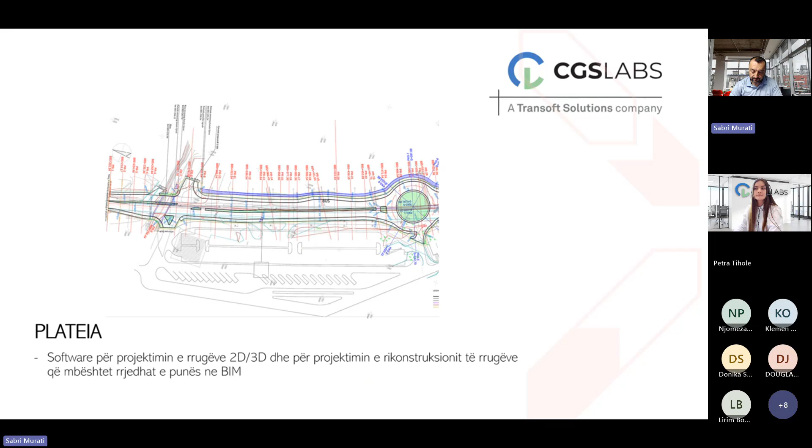Gjithashtu kanë software AutoPath dhe AutoSign, ku AutoPath është software për simulimin dhe analizën për korsitë, rreth-rrotullimet, parkingjet dhe kthimin e automjeteve. Ndërsa AutoSign është software për projektimin e shenjave të trafikut dhe shenjëzimin e rrugëve.

Softwarët e CGS Labs janë software të bazuar në CAD platform, do të thotë që për të punuar në këto software duhet të kemi AutoCAD ose Civil 3D.

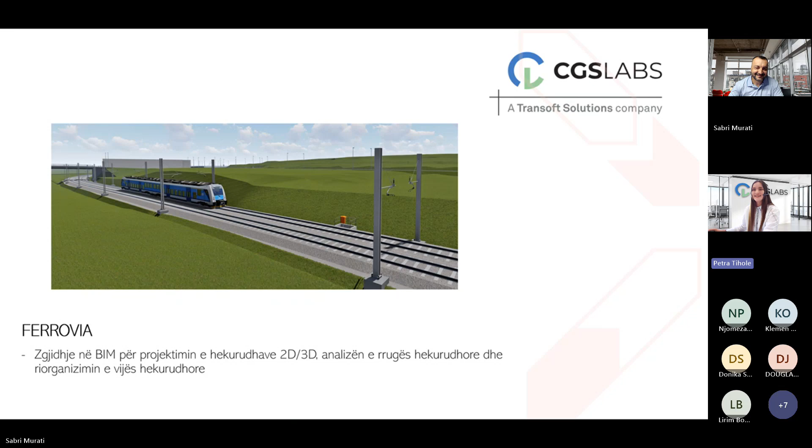Okay, thank you Sabri. Just a second while I share my screen. So thank you again for your nice introduction. My name is Petra Tihole, I'm the product manager for Ferrovia, our railway design software solution, which I will be presenting today. If you have any questions during the session, please feel free to write them in the chat, and I will answer them at the end of the webinar during our Q&A session.

Before I explain what Ferrovia actually is, I would like to start with the bigger picture. Why do we even need a solution like this in the first place? Railways today face many serious challenges. Designing new lines is very complex, not only because of strict geometry and high safety standards, but also because our cities are becoming more urbanized. Very often there is simply not enough space, and every alignment has to be carefully planned to fit into the existing environment. At the same time, more projects have to be delivered using the BIM methodology, which means designers need to develop new skills and adapt to new ways of working.

Another big challenge is reconstructions. Many railways were built decades ago and no longer meet today's requirements for speed, safety, or capacity. Upgrading them means we have to combine old infrastructure with new standards, often in very limited conditions. On top of that, such projects sometimes require very fast solutions, and this is exactly where the software has to support us. It needs to be professional, powerful, but at the same time simple enough to learn quickly so that all colleagues in the team can use it efficiently.

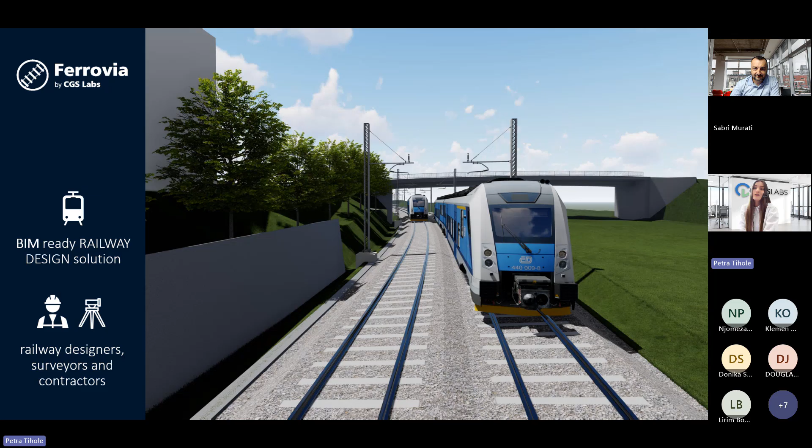And with this in mind, let me now introduce Ferrovia itself. Ferrovia is a professional, BIM-ready railway design software developed by us, by CGS Labs. It runs on top of AutoCAD, Civil 3D, and also on BricsCAD, so engineers can work in the environment they already know. The workflows inside Ferrovia are designed to follow real engineering practice, which makes the software both powerful and at the same time very easy to learn.

If I compare Ferrovia with Civil 3D or with OpenRail Designer by Bentley, you must know that those other software solutions are very complicated to learn, sometimes also to use, especially if you are a beginner. But with Ferrovia, I will show you one workflow today that it's very easy to use. Every time I talk with our clients, they always tell me they love using our software solutions because they are easy to learn. If we got a new employee, we can teach him very quickly.

So I think that's the biggest advantage of our software solutions. And also when we are developing new features, new tools, we always have this in mind. As a team of developers, we join together in a team meeting and discuss, okay, is this dialog box fine? Will people understand where they have to put data and what is the output, or is it complicated, and we can then do something about it. So we really try hard that our software solutions are very easy to use.

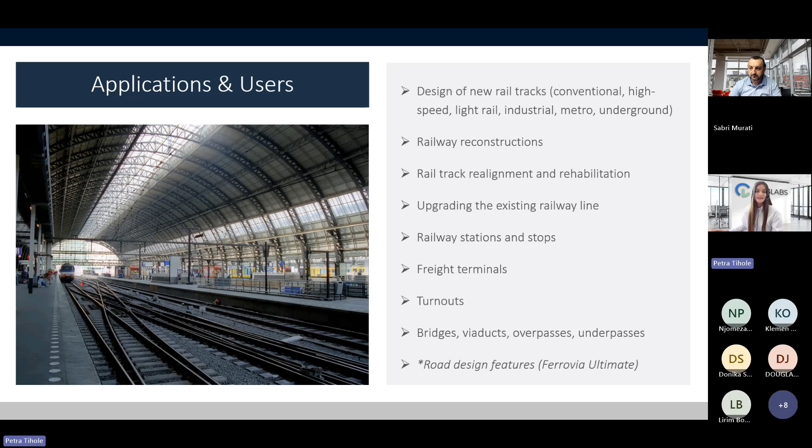When engineers are designing a new railway line, Ferrovia supports them from the very first steps. In the conceptual phase, different alignment alternatives can be tested quickly using digital terrain models and geometry design tools. Later, the same concept can be developed into a fully detailed BIM model with horizontal and vertical alignment, transition curves, cross-sections, and 3D solids. This means one single software can take you from a simple idea on the map all the way to a precise, data-rich BIM model that can be shared with other disciplines and used for construction. Now let me quickly explain what a typical workflow looks like for such a project.

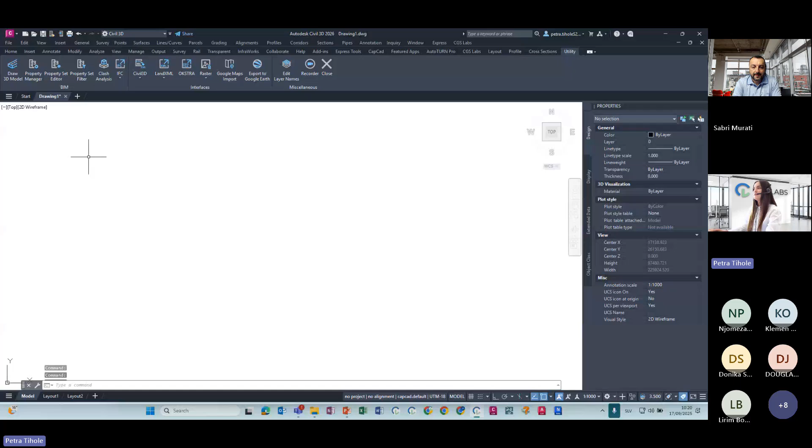Now we will move directly to our software. You can see that it currently runs on top of Civil 3D. If I click here on the CGS Labs tab, I can see all our CGS Labs products. And if I select Ferrovia, then four or five more tabs will open.

In the first step, you have all the commands for digital terrain modeling and creating the alignment. Then for the profile view, cross sections, and then utility tab where you can find tools for 3D modeling and also for BIM so that you can attach property sets to your 3D models. This way you can see it also works like our engineering practices. We usually start with the terrain, continue with axis, profile, cross sections. In this mind, you will also always know where to find commands related, for example, to digital terrain.

So it's very easy to find the commands you are looking for. At the beginning, let's start with digital terrain model. We have a lot of options for how we can import the data or create a digital terrain model. We can import different file formats, TXT file, XYZ. Then you can import point clouds, so you can definitely work with point clouds. You can also work with TIN surface, with CGS Labs TIN surface.

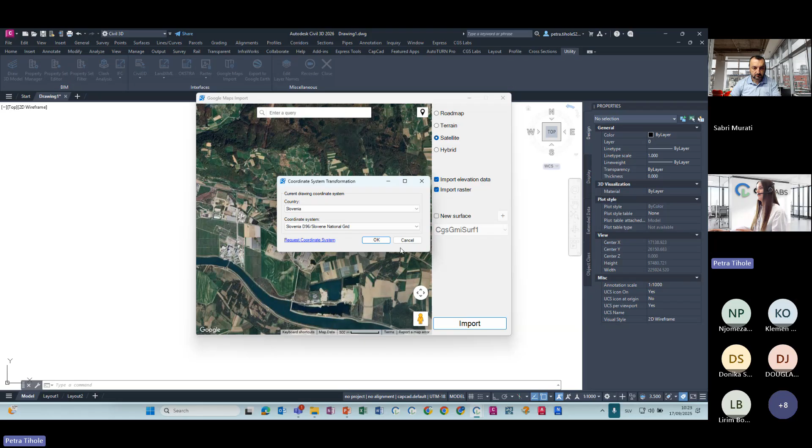You can also create a digital terrain model directly with this command, but this time I will uncheck this option and show you how you can create CGS Labs terrain with different tools. When I click import, I select the coordinate system. Here you also have a lot of different options, and if one is not available, you can always contact us and we will add this new coordinate system. I click OK.

It imported a raster image. You can see it also imported terrain. This terrain is totally fine if you are doing some conceptual design. So for today, it's great. Now I have to continue with creating the digital terrain model.

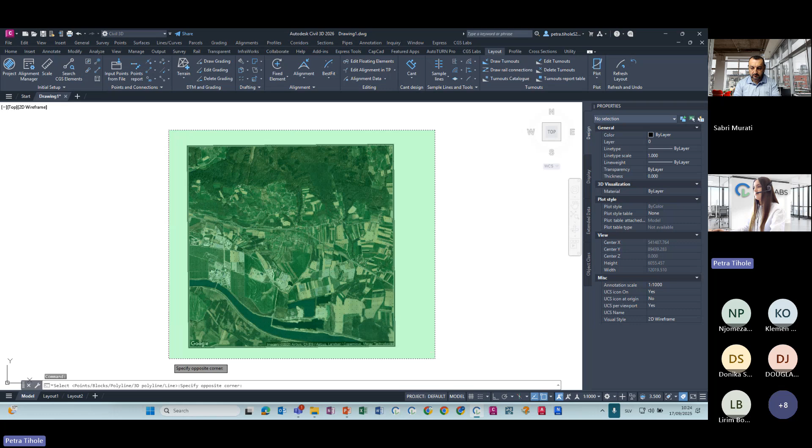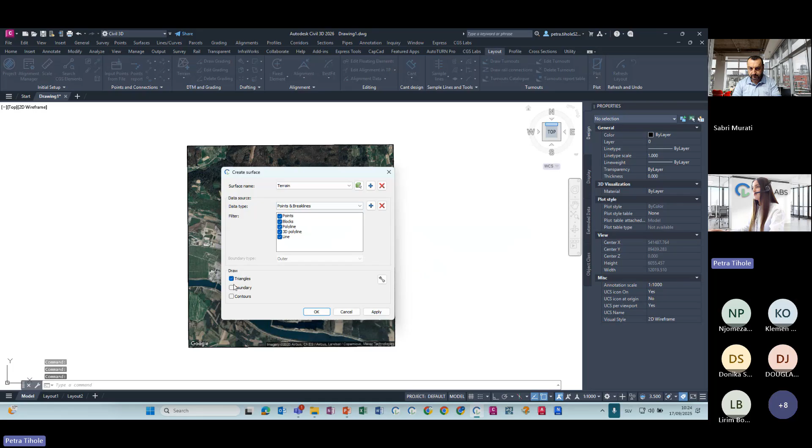Under the layout, here I have different options. I will run this one, define the name. It opens a new dialog box. Then I select the points in the drawing, and I can also select how it will be drawn. If I move, you can see this triangulated network, but I can also just hide it. So let's say I will work with this terrain, but I will just hide it in the drawing.

Then the next step is we can create alignment. But before, we will just define a new axis in the alignment manager. I can define the axis name, then I have different options for starting station, because in railways we usually don't start with 0, but with a specific number. Then this option, if I check it, will automatically drape on the default terrain. Then I have different spiral types.

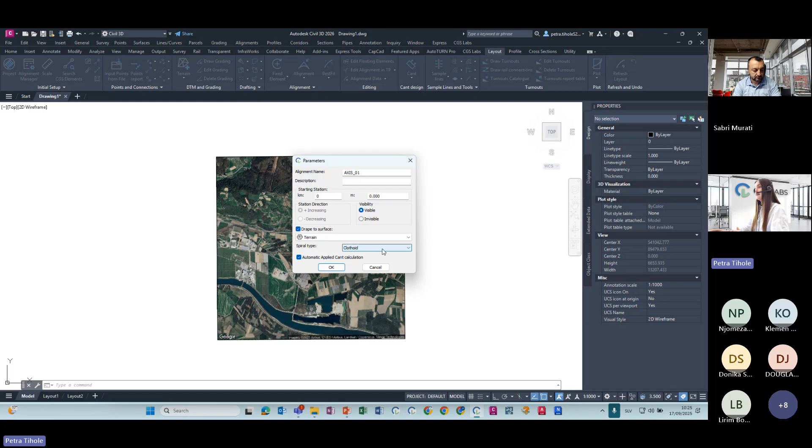You can see that Ferrovia has a lot of different options. And then I can also check or uncheck this. I will uncheck it and show you later how to calculate cant. Then on the category, I have other options: the design speed, gauge, or critical parameters. And I will now draw the alignment.

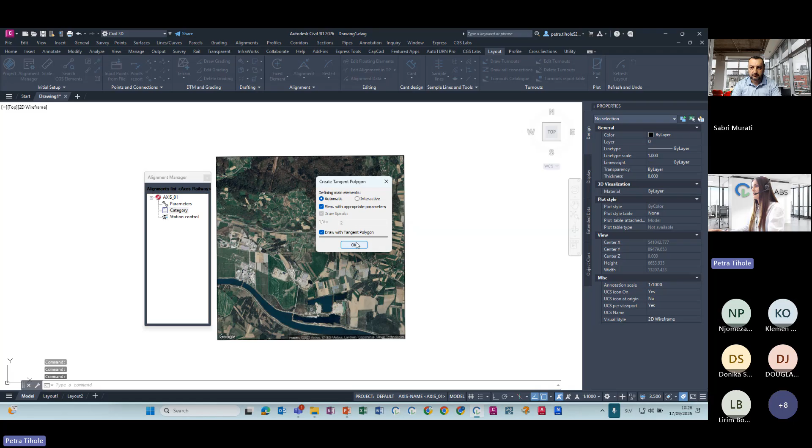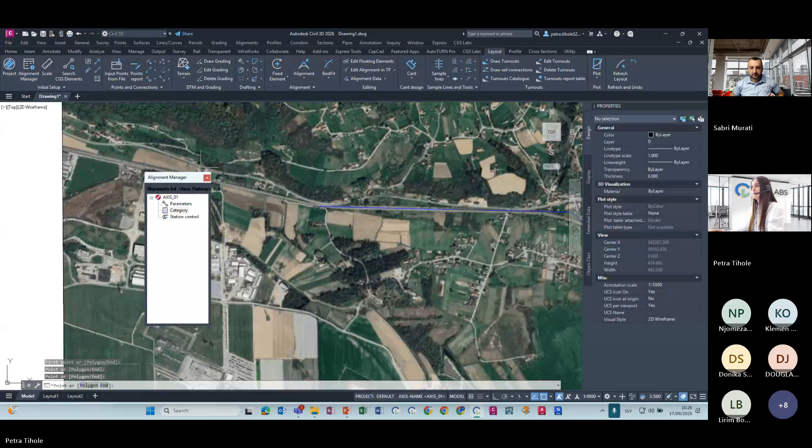Here also a lot of different options, from drawing with tangent, polygon, floating methods, stick method. So I will use tangent, polygon, zoom in, draw vertices, and my alignment is created.

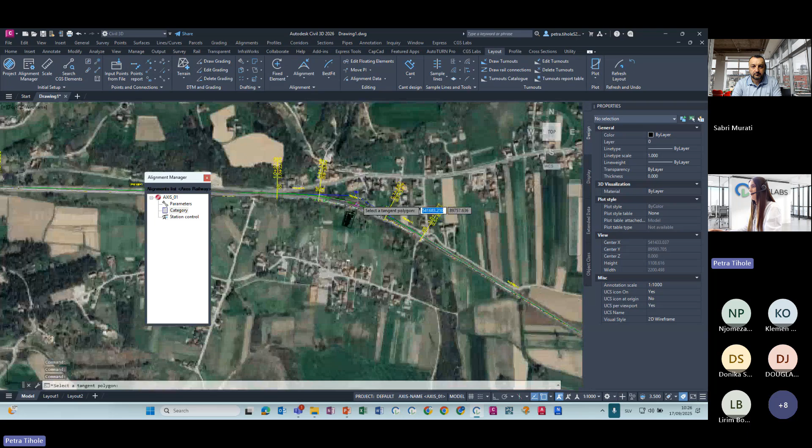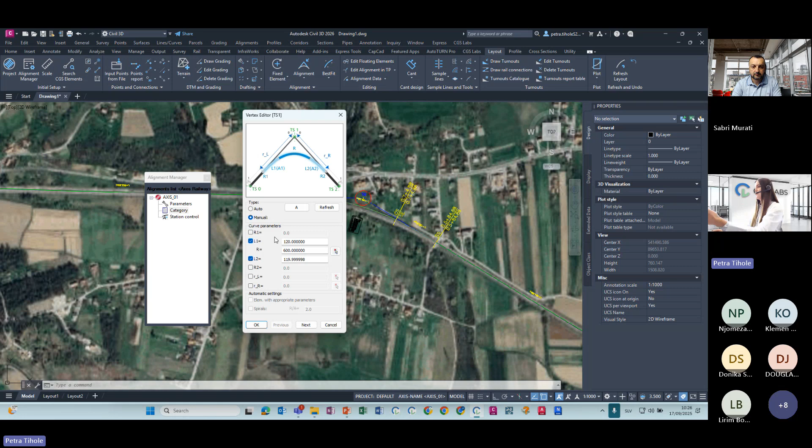I have different options for how my labels will look, and a lot of options for editing. I can move the alignment, and also edit the specific radius. Those values were automatically created, but I have the option to manually change them. Yeah, a lot of different options.

I can create sample lines by drawing them along the axis, and then calculate the cant. First you have to calculate it based on the standard, and then you can open the cant editor dialog box where you can manually change these values.

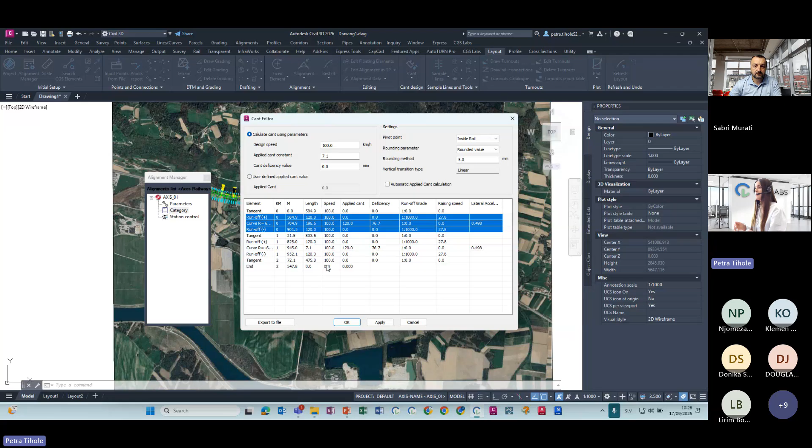Even here in Slovenia, our railway lines are used for passengers and for freight transport, so sometimes we have to calculate our design speed and cant in Excel, and then import it. Right now we are working on this tool, so for the next release it will be much different, because it will have an option to change all those values directly in the tables, export them to Excel, and paste those cells directly here. A lot of news is coming for the new release of Ferrovia.

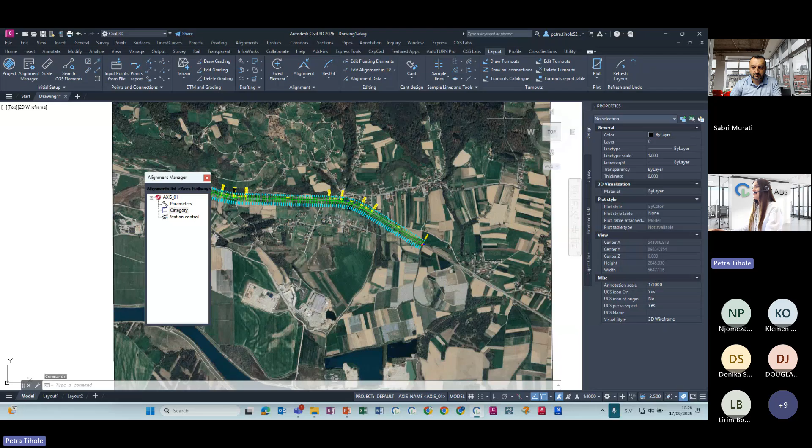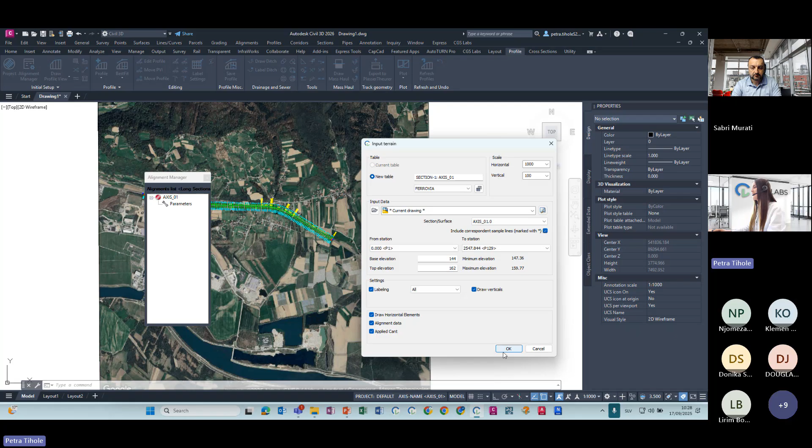After we have the alignment and calculated our cants, we can continue with the profile. I will draw the profile view. There are also different options for how this table will look—it could be totally personalized and localized, and you can change the scale. I will insert it, and then I can create the profile view.

I'll draw a profile. Let's say it will be in the fill at the beginning, and then I just define it. This is just a simple, quick example today.

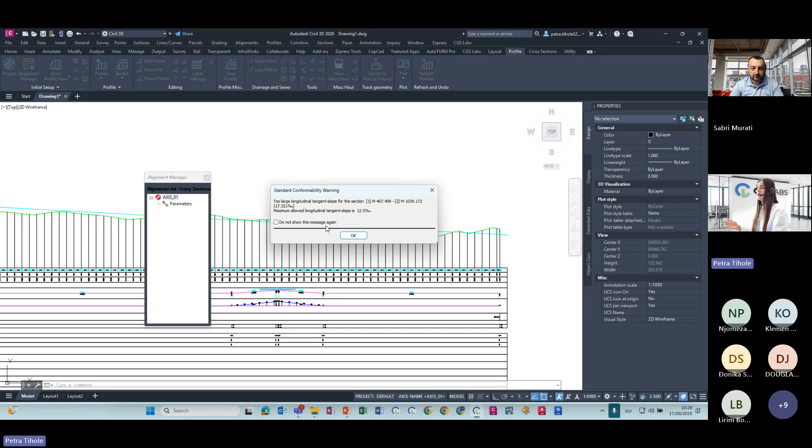You can see that it also warns you, because Ferrovia is localized for some countries, and right now it's showing me a message that the longitudinal tangent slope is too big, so it warns you that you have to change it. But you can also continue if you want.

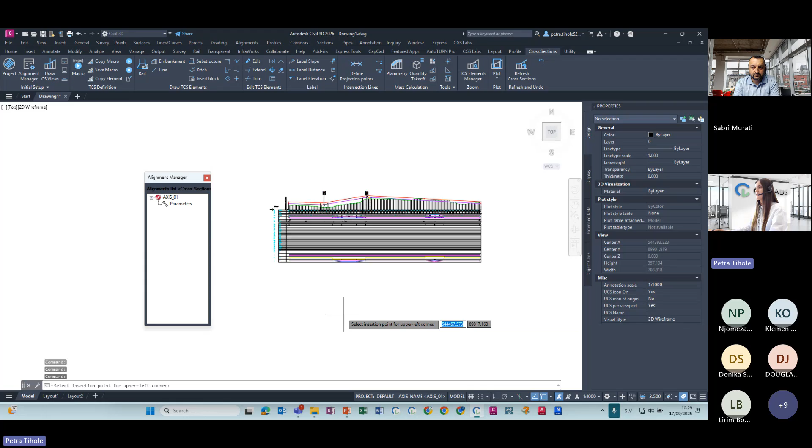After the profile, we can draw a cross-section view. First I will insert them into the drawing, and then I will also draw the rail.

Here is another dialog box where you can define all those parameters, like the rail type—you can change it and select between different types, or you can add your own.

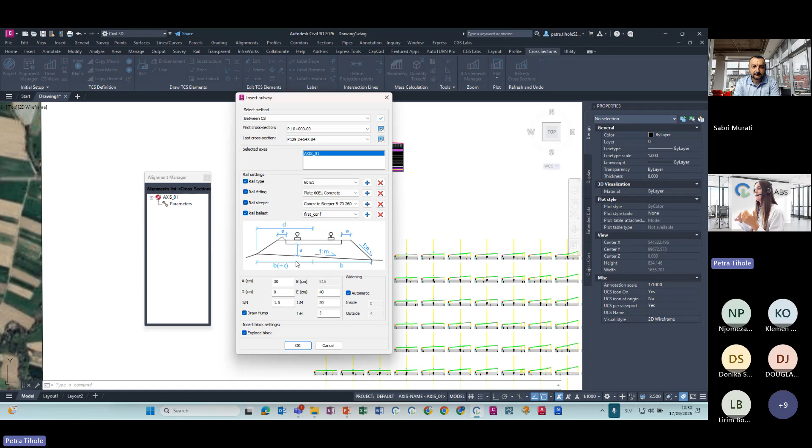Then there are sleepers—you can select between concrete or wood, or as I mentioned before, totally localize for your country and add your own blocks. At the bottom, you can also define all those parameters and the slope, which could be unconditional, one-way, or two-way. So different options are available.

I will just insert it, so it will draw it right now. I selected that it will draw those elements in all cross sections, but you can also select just a specific one, which is important when creating typical cross-section elements.

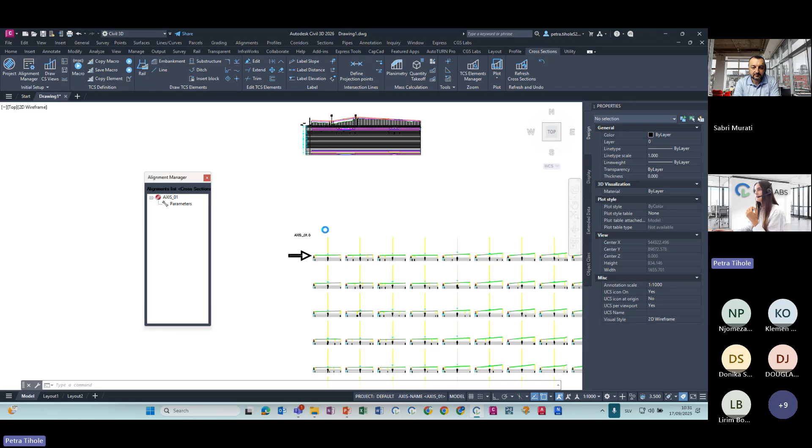At the top we have different options for how to draw typical cross-section elements. Right now I inserted the rail, but you can also draw the embankment, substructure, or ditch—those are some typical elements—and then you can also insert a block.

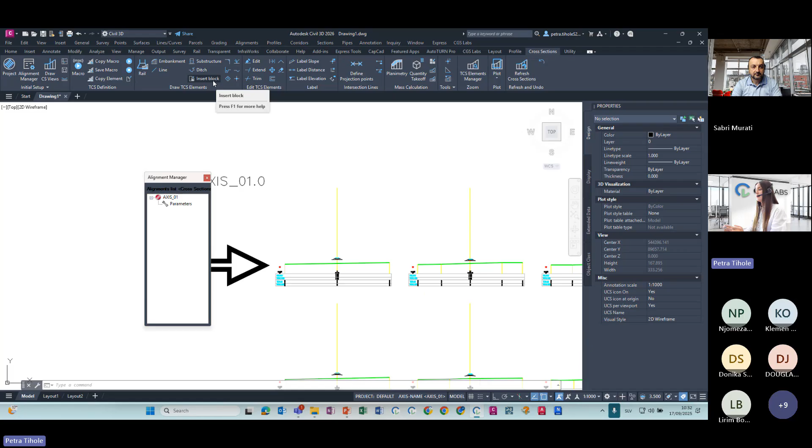What is also very good about blocks is that in the last release we added the option that if you have hatches in the blocks, they are automatically converted into our planimetry quantities, which means that based on them you can calculate quantity takeoffs and also create 3D models.

So if I zoom in now, you can see my cross section. The next thing is that I can draw other typical cross-section elements—for example, embankments.

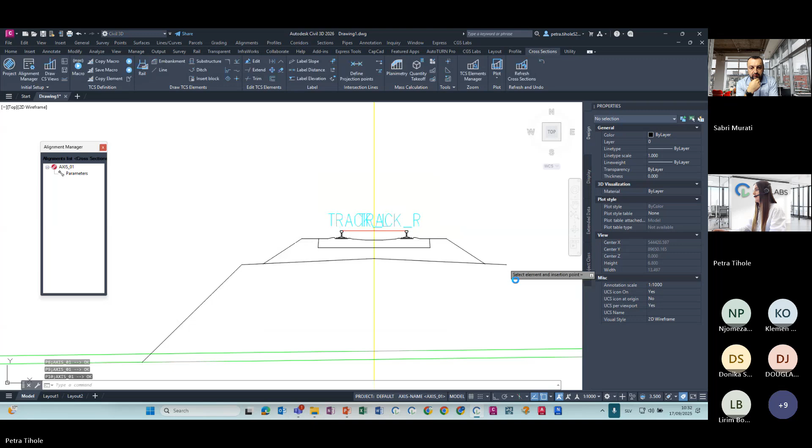Then I can start with planimetry. Planimetry is very important because it's the basis if you want to do the quantity takeoff and also create those 3D models. Planimetries are basically hatches inside those elements.

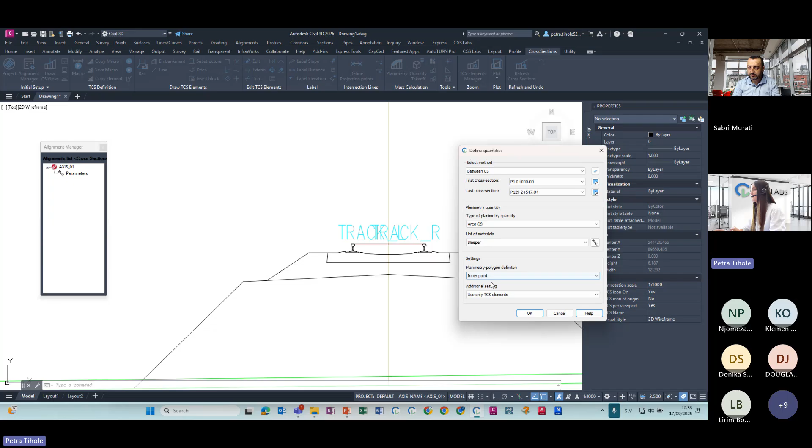So I will show you how I can—sorry, sleeper, okay. I have different options. First, for this sleeper, I will use the inner point—I just click somewhere on the polyline and inside it, and it will automatically planimetry all those cross sections. But I also have different options.

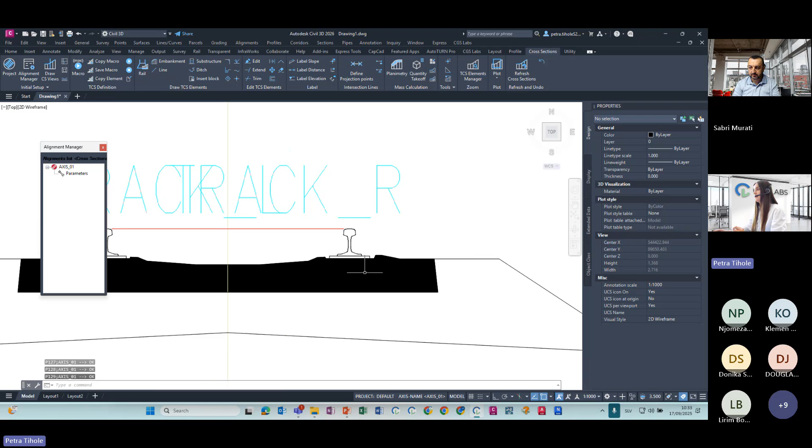I can also planimetry between two polylines, for example. Just a second, I will select the ballast—click, this way I select all the elements around, and it will planimetry this area.

So we can see it's very easy to define those cross sections, to define those hatches, those planimetry quantities. We also have one tool which is very useful—this is the macro. I will show you on the first five. Just a second while I find it.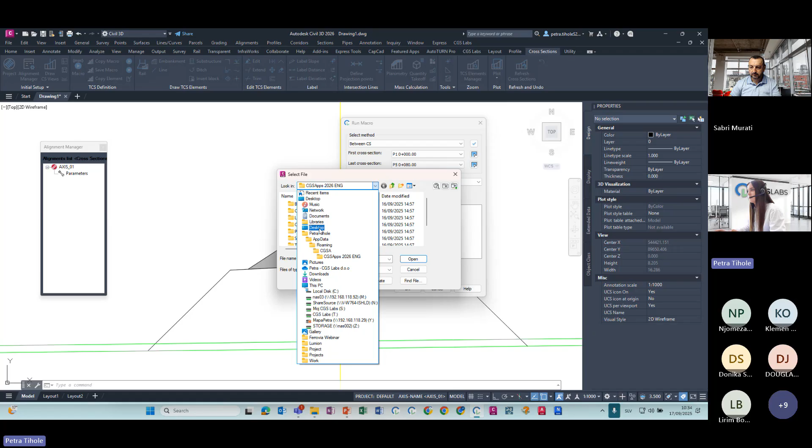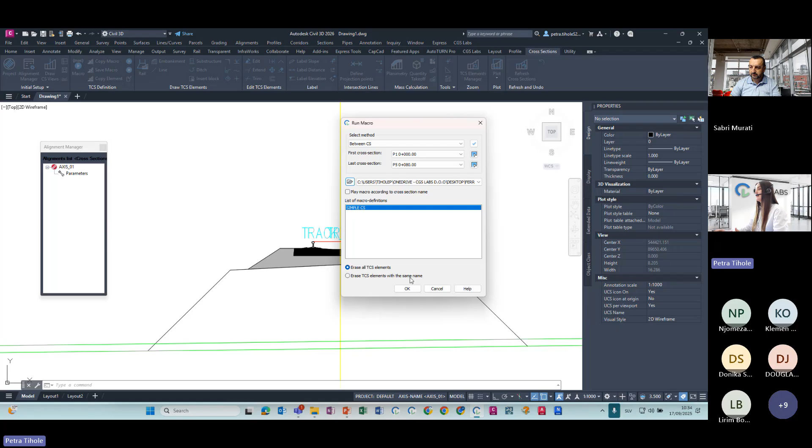Okay, so this is basically like the library of cross sections. Once you create one cross section, you can save it in the library, and then you can use it in other projects. So that's very useful. You can also send those macros to your colleagues so that they can also use it in their projects. So that's why it's very useful.

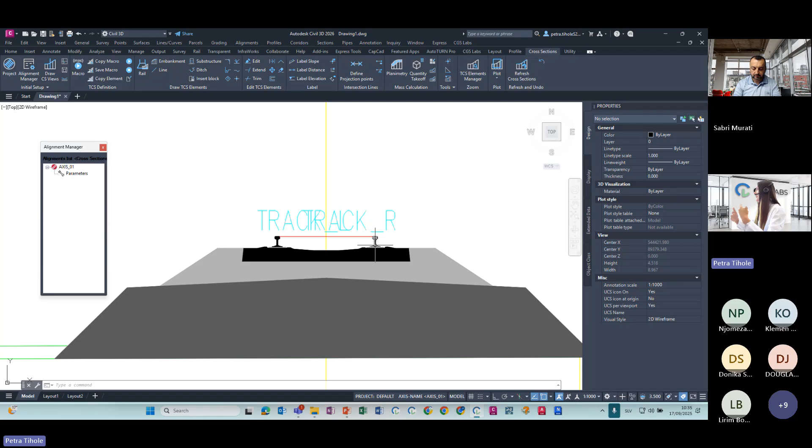And you can see that I created one basic cross section with those hatches. We are calling them planimetric quantities for each element. Based on this, we can then create quantity takeoff. So I will insert this in the drawing. I will not save it in the file this time, and also here, so you will see what will happen.

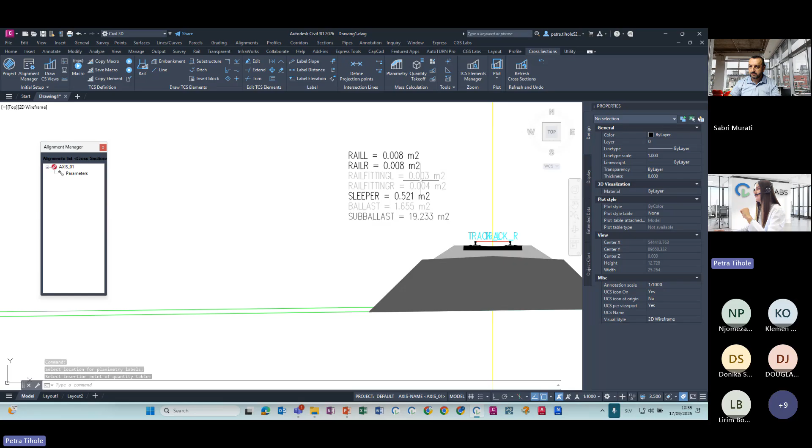Okay, so here I have all the volumes, the quantities for these cross sections, then here for the second one, and here I have a table for all the quantities in the drawing. Right now I have only the first five. And after I have those planimetric quantities, those hatches, I can also create a 3D solid. This is the way our software solution works.

So in this dialog box, I have to define where the drawing is saved. Right now everything is in my drawing, because you must know that Ferrovia can also work in a way that you are saving your drawings separately. So in one drawing you have a layout, in one drawing you have a longitudinal profile, and in the third one you have a cross section.

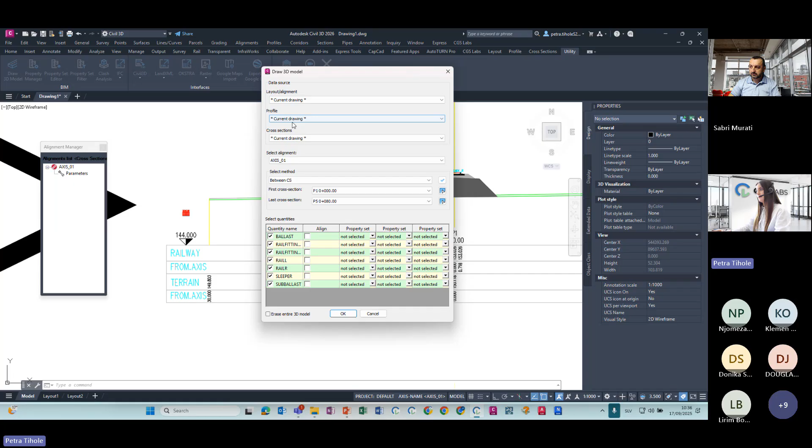That's why it's also giving you the option that you can select the drawing. And then here I select the quantities - those are the names of those hatches, of those planimetric quantities. And then if I want to create a BIM model - okay, unfortunately we don't have enough time today - I can also select property sets here and they will be automatically attached to the 3D model. That's the reason why designing here is very quick and easy.

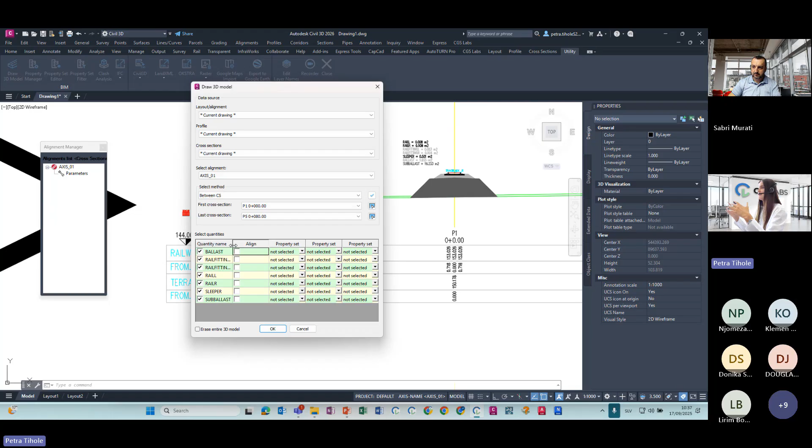And this align option is also something we usually check, that for curves, for example, it will do a very nice model in the curve. So it will follow the alignment, it will not be straight, but it will be curved. So that's why we have this align option.

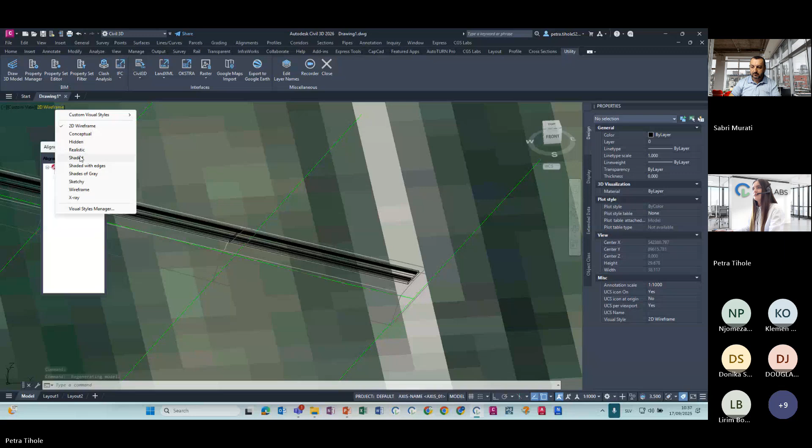But I will just draw the model, the beginning of the model, and you will see here that the 3D model is created. If I zoom in a little bit more, you can see the rails, the sleeper, ballast, and sub-ballast.

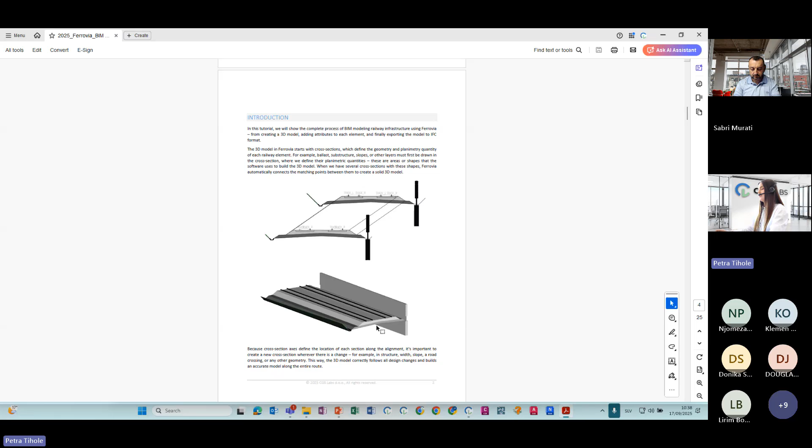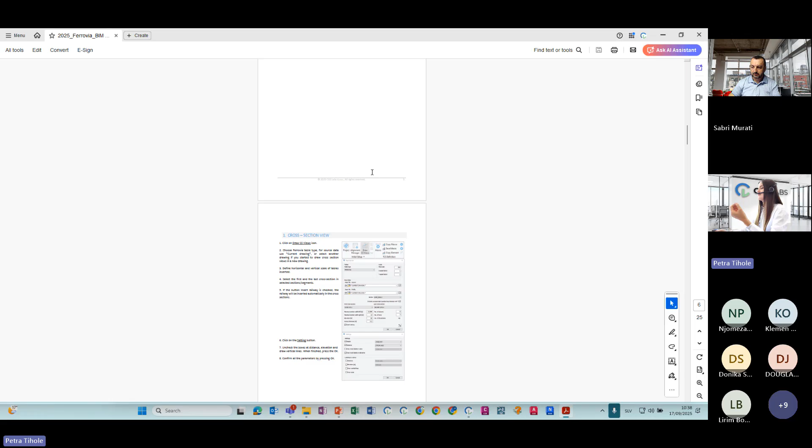Unfortunately we are very limited with the time today, but if you're interested more about BIM modeling, on our website you can also find this tutorial where we explain how you can create a double track railway. And also here is some noise barrier, and here is the whole process of how you can create those BIM models, and some useful tips and tricks.

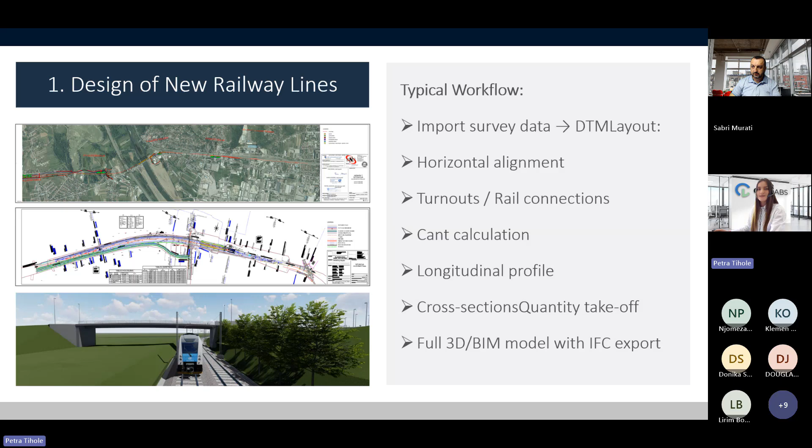But yeah, also, as I mentioned previously, if you're interested more about the workflow for more complicated projects, we are always available and happy to assist you and prepare another presentation. And of course, as I said, Ferrovia is used for much more complex projects and challenges.

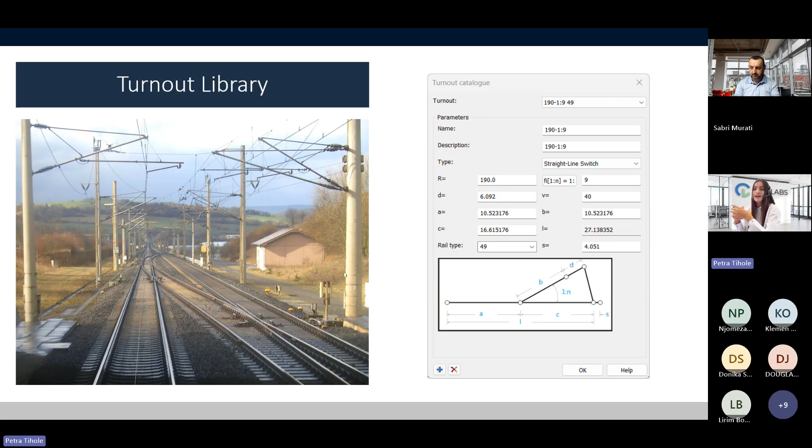As I showed you, with parallel alignments, with connected turnouts, Ferrovia also includes tools for automatic turnout insertion, where you can choose from a very big turnout library, and if needed, you can also add your own custom turnouts to the library.

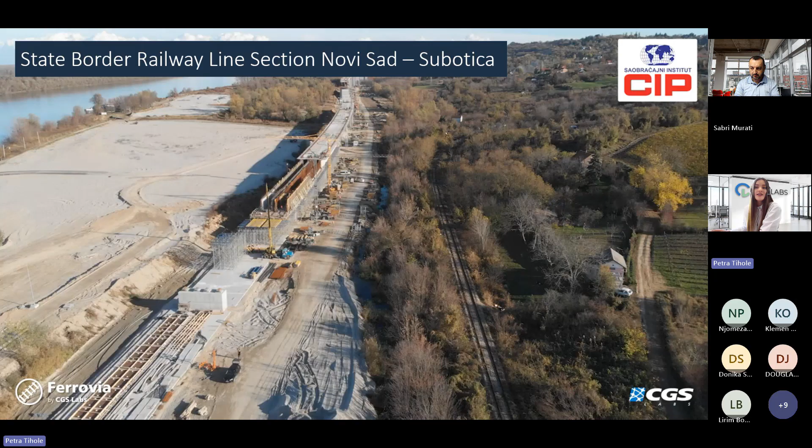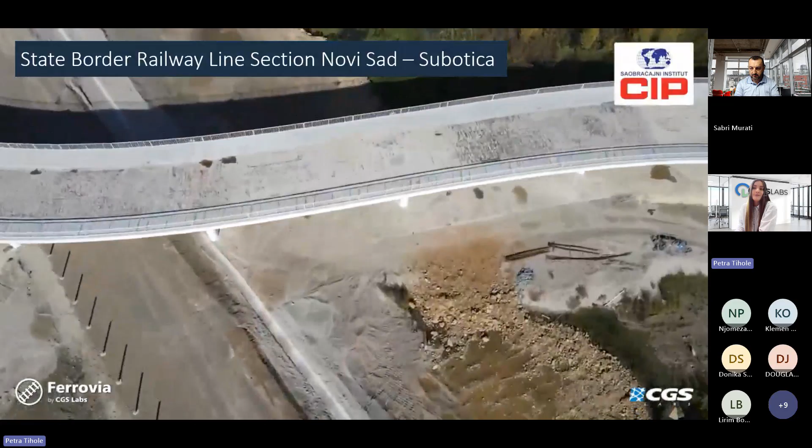And so, yeah, with Ferrovia our users design different complex projects. One example is this railway line section from Novi Sad to Subotica, which is part of the modernization of the international corridor between Belgrade and Budapest.

And the designer said that the biggest advantage of Ferrovia is its flexibility and dynamics, which allows rapid preparation of project documentation. They were also very happy with the CGS Labs support team, which was fully engaged and provided all the necessary help for this project.

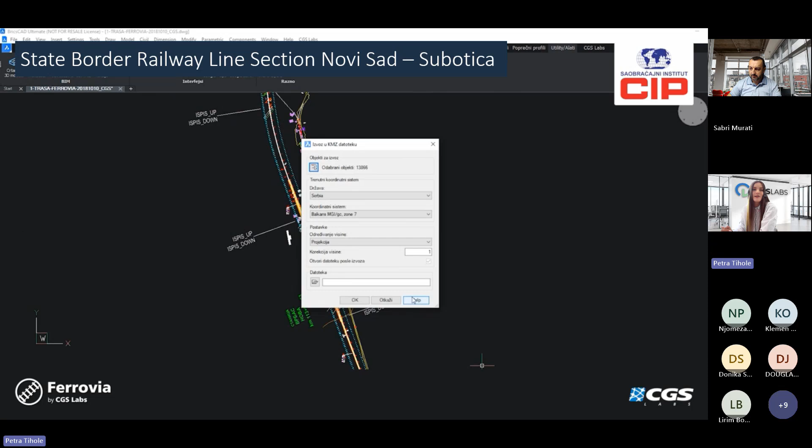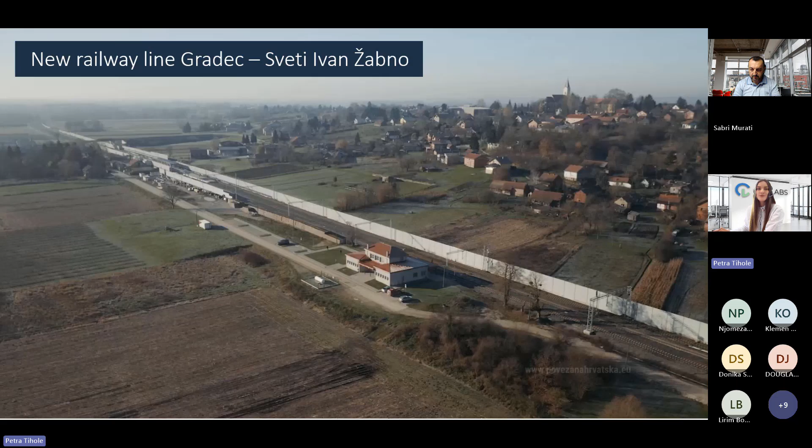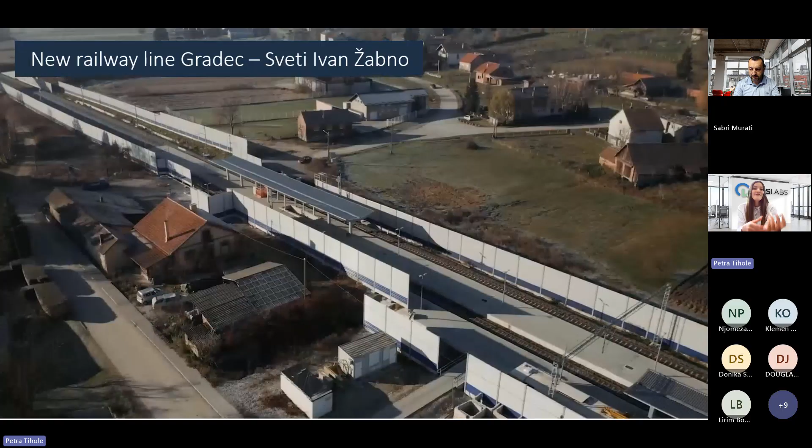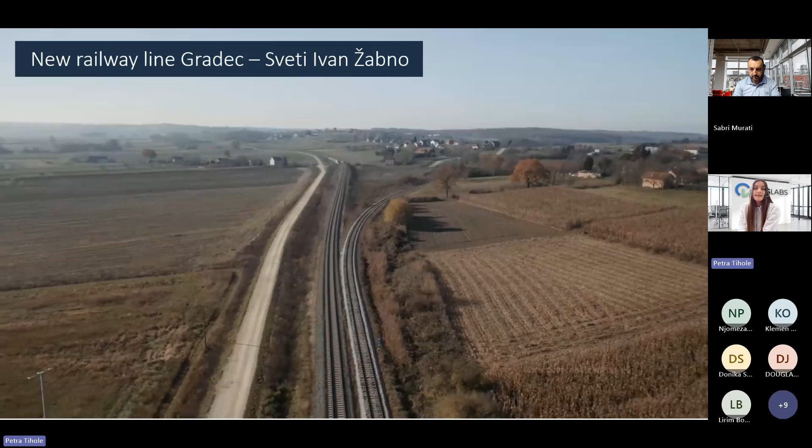The second case study I want to show you today is the new railway line Gradec Sveti Ivan Žabno in Croatia. Fun fact: this was the first newly built railway line in Croatia in 52 years. The project was designed by the company Granova, which used Ferrovia to prepare the complete project documentation, including the alignment, profiles, cross-sections, and all related design elements. The line connects to existing railway corridors and will significantly improve regional mobility.

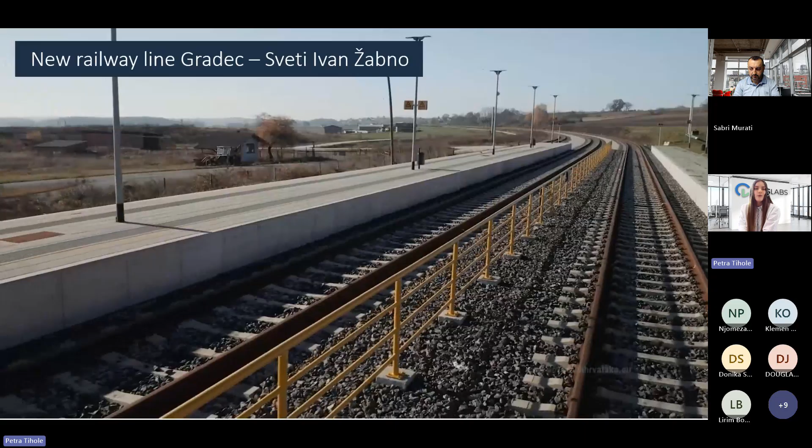In this video, you can see all the new railway tracks, also new stations and new smaller stops.

The third case study I want to present today is the Ilidža-Hrasnica tramway line in Sarajevo. This project shows that Ferrovia is not used only for conventional railways, but also for tramway systems. The line is almost 13 kilometers long and is one of the most important public transport projects in Bosnia and Herzegovina in recent decades. The design was prepared by the IPSA Institute, a leading engineering company in the region, and the project included 2 terminal stations, 11 tram stops, 7 switches, and complete reconstruction of the road corridor.

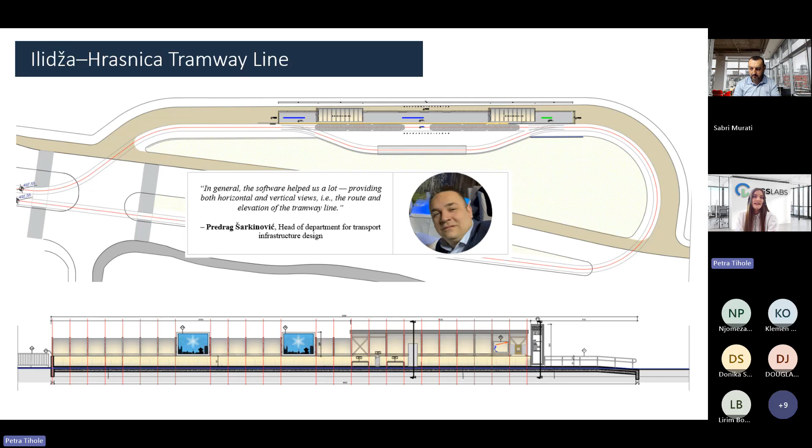One of the main challenges was the very limited space, because the line runs through a dense urban area and also crosses protected water zones that supply most of Sarajevo's drinking water. So Ferrovia was used to design the horizontal and vertical alignment model, cross sections, and integrate the stops and stations. In the end, the tramway will improve urban mobility, reduce traffic congestion, and support more sustainable development for the Sarajevo region.

So until now we have been talking about the design of new railway lines, but the second very typical use of Ferrovia is for reconstruction projects. Many of our railways were built decades ago and no longer meet today's requirements for speed, safety, or capacity. Upgrading them means we have to combine the old infrastructure with new standards, often in very limited conditions. This is exactly where Ferrovia has special tools to make the job easier.

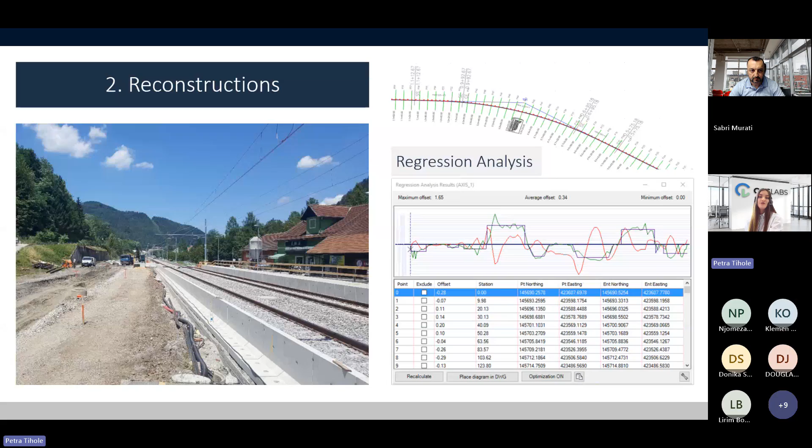One of the most important tools is definitely regression analysis. With these tools, engineers can take survey data from the existing track and calculate the best fit alignment. This allows them to understand how the current track is positioned and where corrections are needed. Based on this, Ferrovia makes it possible to design new alignment profiles directly on top of this survey data.

The third very typical use of Ferrovia is for maintenance and realignment. As we all know, over time tracks move away from their ideal positions. This affects the comfort of passengers, and in the worst cases, it can even reduce safety. That's why regular track maintenance is so important. In recent years, we established workflows that make the verification of horizontal and vertical geometry much simpler, exactly as needed in field maintenance scenarios.

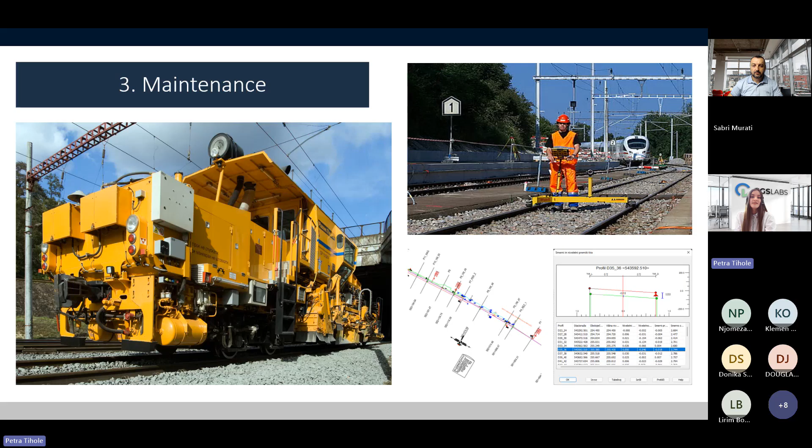The process starts with field measurements, which can be carried out using traditional surveying methods or with a measurement trolley. These measurements are then processed inside Ferrovia, and the dedicated models allow an analysis of deviations, and the results can be exported in formats compatible with mechanized track alignment systems such as tamping machines. This means maintenance teams can very quickly check the track condition, calculate best fit alignments, and prepare precise correction data. The whole process is digital, which saves time, reduces errors, and ensures much more reliable maintenance of the railway.

Since Ferrovia is used in many different types of projects, we also offer different packages to match these needs. It is available in 3 different versions: standard, professional, and ultimate. You can find more about those packages on our website. What is also very interesting is that ultimate, the biggest package, is the most popular. It also offers you all those regression tools, 3D modeling, and also some tools for designing roads. So some tools from Platea are also available in Ferrovia Ultimate.

Another important advantage is that CGS Labs provides many free training resources. You can find free tutorials and webinars on our YouTube channels and blog, and in the CGS Labs Academy Help Center. We also share reference stories where you can learn from other engineers how they are using our software solutions. And of course, our support team is always available if you need any direct help.

And finally, I would like to mention BIM training certification. CGS Labs is an official training provider of buildingSMART International. This is an internationally recognized program where after completing the training you can take an online exam and obtain a certificate. In some countries, this certificate is already becoming a requirement in tenders.